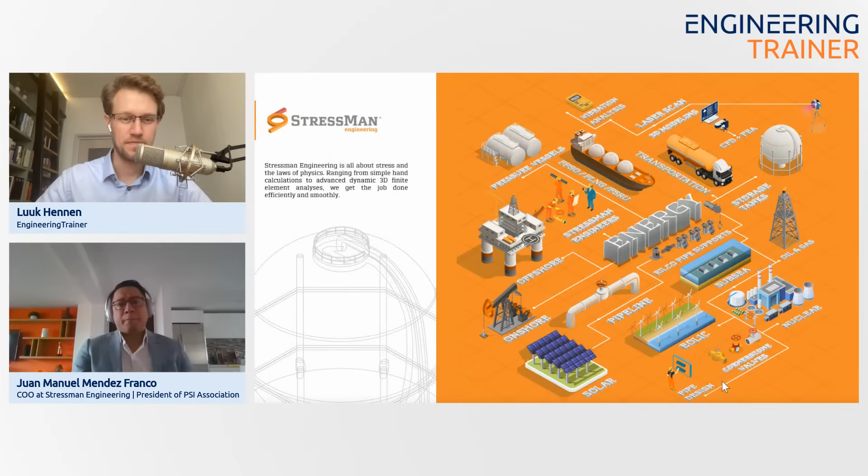Now we're going a little bit into green energy, solar, eolic. We can help you with the CFD, FEA that may be required for your project. We can support you on that and help you with piping design, a little bit more simple, but also quite important. When you have an experienced piping designer, it's going to help you save time, materials, and manpower, when you can run your projects properly.

I think this is the last one related to Stressman, or two more. We have executed more than 370 projects around the world.

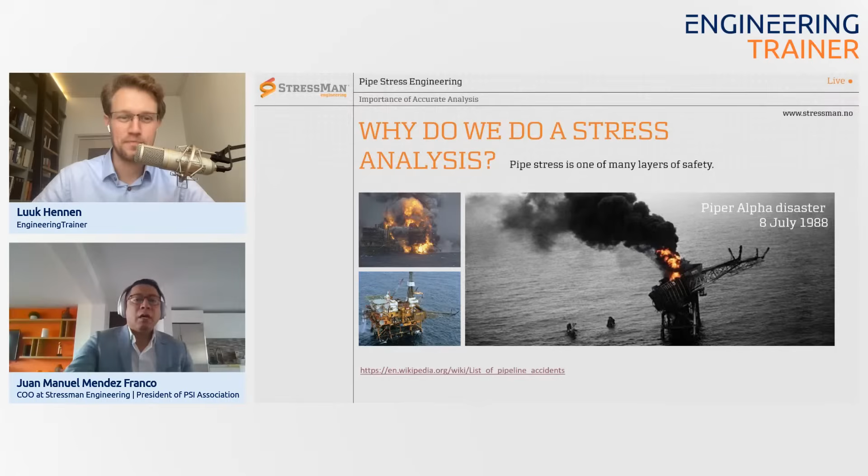Well, I'll definitely have a look at this. It was a coincidence. This is an accident that happened in Mexico. I think that is too loud. Okay, it's better now, right? So this was an accident that happened in Mexico last year, July, fairly recent.

I saw these images. They are quite impressive, to be honest, because it looks like lava coming out from the ocean, and it was a gas leaking.

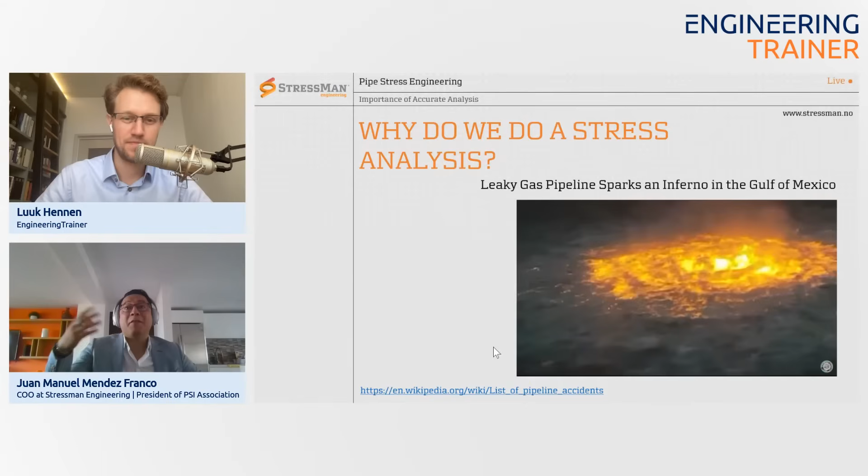It was funny because that day, this happened in the Gulf of Mexico, and that day I was in the Gulf of Mexico. For whatever reason, I had a tour in a helicopter as well - one of these companies that provide services taking people from onshore to offshore platforms gave me a tour. So I was flying when this accident was happening, and a lot of people thought that I was actually there having a look at this, but I wasn't. I was maybe 300 kilometers away, not so far, but I was in that region.

So these are again more accidents that can occur because of poor piping analysis, or not because of poor piping analysis, but because of poor engineering.

Well, to continue, for people that are not so familiar with piping stress analysis, there are three different types of loads that are normally reviewed to verify the stresses on the pipe system. The first one, the piping loads - the primary loads - are related to the weight of the pipe and the internal pressure.

Then you have the secondary loads that are related to the temperature of the piping system. And the last one are the occasional loads, related to loads that may occur but not all the time, such as wind, earthquake, snow, or when you have a PSV going off - you have to do analysis for that as well. All these three loads combined, that's the way that you calculate your piping system and design your piping system.

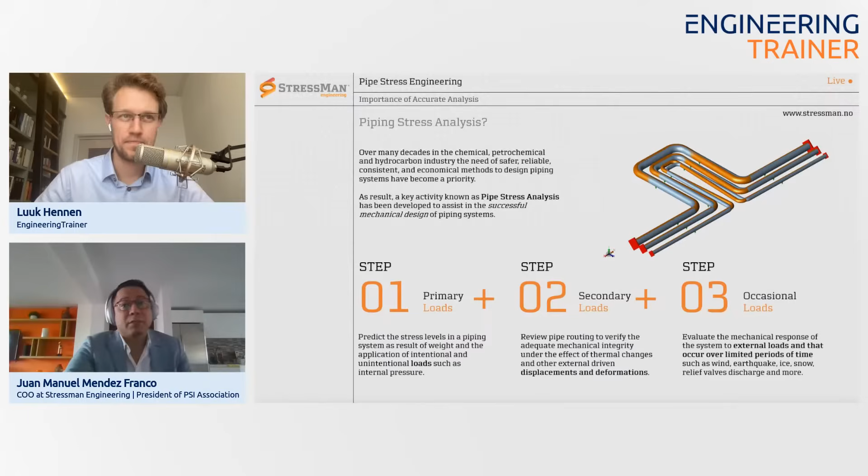This is just the very basics. I don't want to go into details. I guess the ones that are already piping engineers, they already know that part, and the ones that do not know, well, it's just a very simple explanation of what's involved in piping stress analysis.

So this is the main part. I want to talk about this from a piping lead or a project manager perspective. Perhaps the most accurate would be from the piping lead perspective. Project managers sometimes are not so involved with the technical part, but at least the piping lead needs to be, because we have to make some technical decisions in order to meet the timeline or deadlines of a project.

The definition of accuracy is important because that's the degree to which the result of a measurement, calculation, or specification conforms to the correct value or standard, and essentially refers to how close the measurement is to an agreed value. So that's the definition of accuracy.

We have this graphic here, where obviously the faster you are in your calculation, the more speed you have, but the less accurate, because people make mistakes. The faster you go on anything, the less time you have to do detailed stuff, or the less detail in things you have to do. If you want to be more accurate, the speed of the project is gonna be lower. It's gonna take longer, but it's gonna be more accurate.

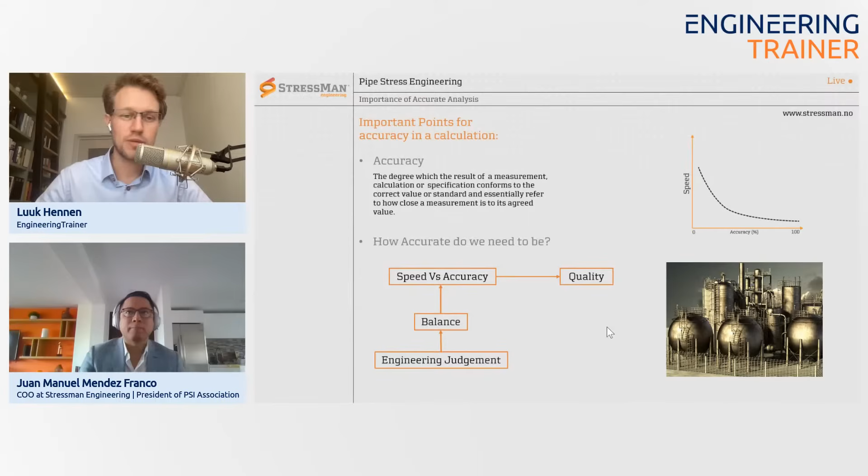How it's an interesting concept, engineering judgment. We run a training platform, so it definitely comes to the table every now and then. How do you teach people engineering judgment? Obviously working a lot helps, but the big question is how to speed up that process. Looking back at your career and the projects you did, Juan, what would you recommend to juniors or people at any point in their career to improve their engineering judgment, because that can be challenging?

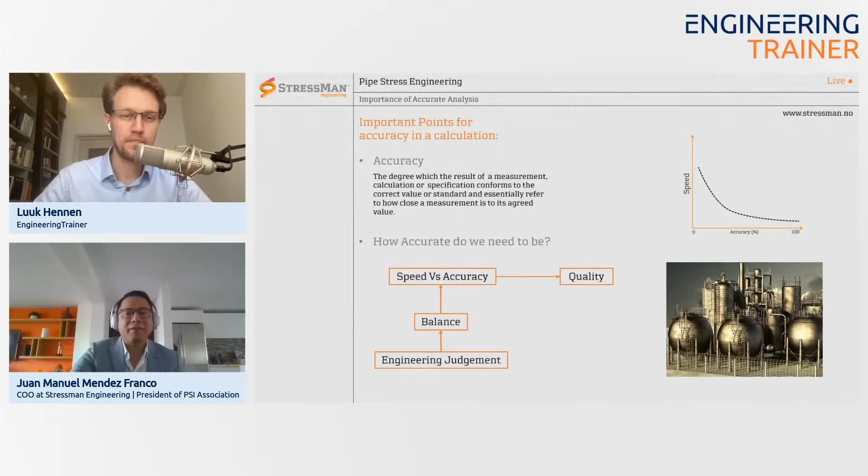How can you change that? If you have a more experienced engineer, at some point he was there, now he's here. Over the years, when you start doing something over and over and over, some people say it's the 20,000 hours - I heard 10,000 hours too, but you hear these numbers - that's when you become an expert in something. So 20,000 hours is around 10 years, because each year is around 2,000 hours, at least in the US, considering 52 weeks and 40 hours per week, it's 2,080 hours per year.

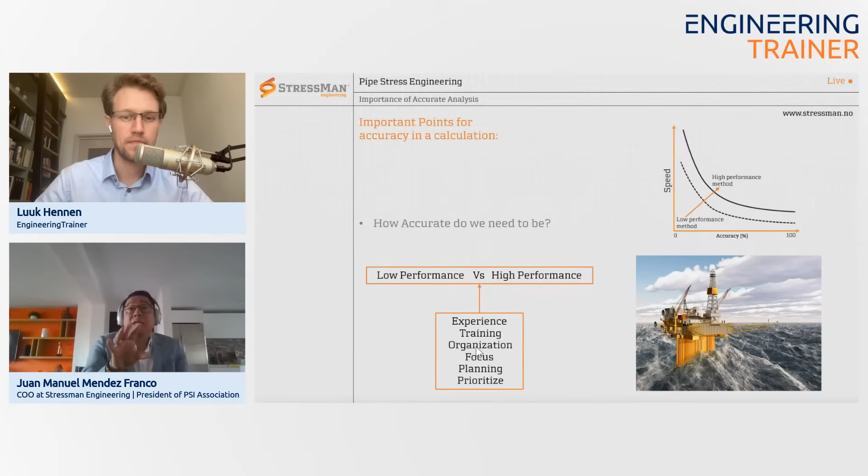So these are some strategies that you have to use to go from low performance to high performance.

We got an interesting question, and I think it's related to this slide as well, Juan. Let me address it. First of all, Ahmed Ali, thanks for asking the question, and thanks for joining the chat. Ahmed asks, how can we make the balance between speed and accuracy? You already touched upon it, it's hard to have it both ways. Maybe we can touch upon that topic during this slide, Juan.

So as an engineer, how do you make that balance between speed and accuracy, how do you make decisions for details? Well, that's something I'm going to talk about a little bit later, but it's a very good question, because there are so many variables to know what's the right balance between speed and accuracy.

Exactly. Okay, I don't know what I did. Okay, here we are, and this is the other graphic that I have. This graph is quite interesting to me, because this is something that affects projects, not just one calculation. Help me out a little bit, Juan. What exactly are we seeing on the axis?

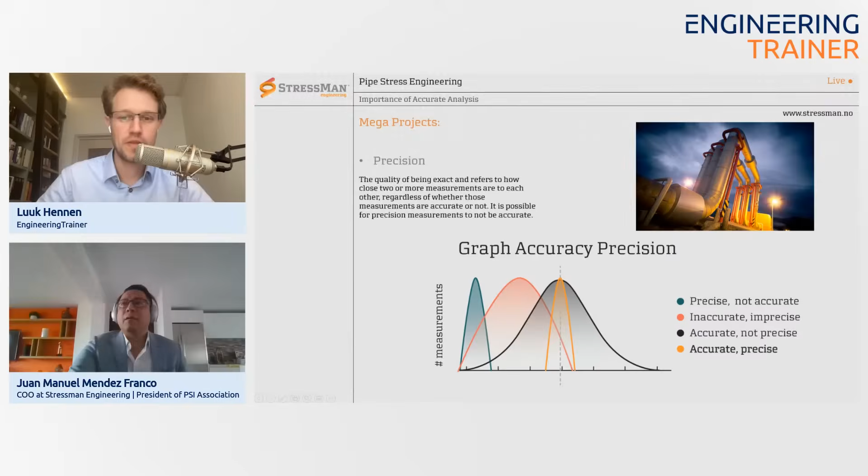So I think that's interesting. And now here we're coming to that section where it may address Ahmed's question. And we need to understand this is not a science project. When we do piping stress analysis, when we execute a project, we are not doing a science project. We have a limited amount of hours assigned to each activity, eventually to a project that we need to get things done fast pace. It needs to be like that.

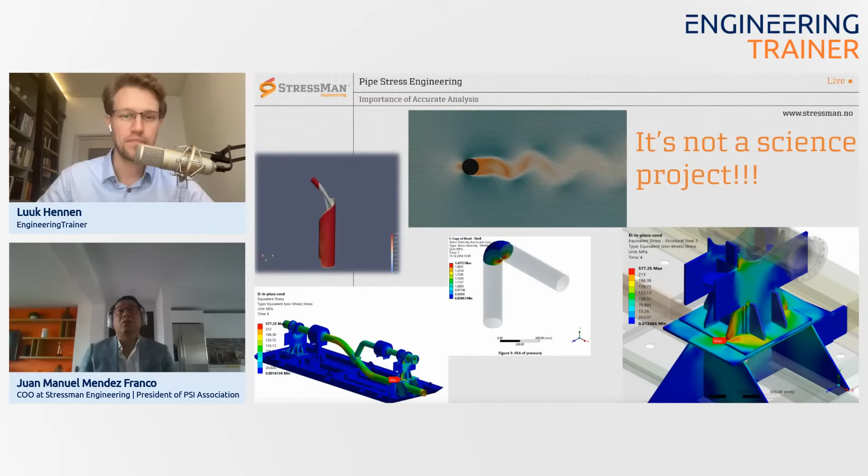And here are very complex analyses, some R&D that we have done for what we do in piping stress. I would say that 90% of the analysis are not so complex. Obviously, there is analysis with compressors, reciprocating compressors, vibration, dynamic analysis, where you need more experience and you're going to spend more time. But we need to understand this is not a science project.

Let's go to the next slide. Okay, this is the stage of the project. This also helps to address Ahmed's question about how can we find the balance between speed and accuracy.

Exactly, it depends. One variable that we can have into the equation is the stage of the project. Let's say for piping, they are normally going to get involved in pre-feed, feed, and detailed design. I remember the very first time that I worked on a pre-feed project was Cameron LNG. That was back in 2000, I think it was 2012.

Right, and it was the pre-feed for this project that I eventually worked again on, but in the detailed design stage. So in pre-feed, I remember I made some simulations, I did some piping stress analysis, but we didn't even have the correct location of the equipment. I remember I did some compressor calculations, but it was more to know that the system was a little bit flexible, that we could have the proper elevations between nozzles, sometimes especially for large bore pipe, like in the ones you can have in an LNG project, the elbows, sometimes when you try to go down, because it's like 1.5 times the diameter and you have two elbows, it's 3 times.

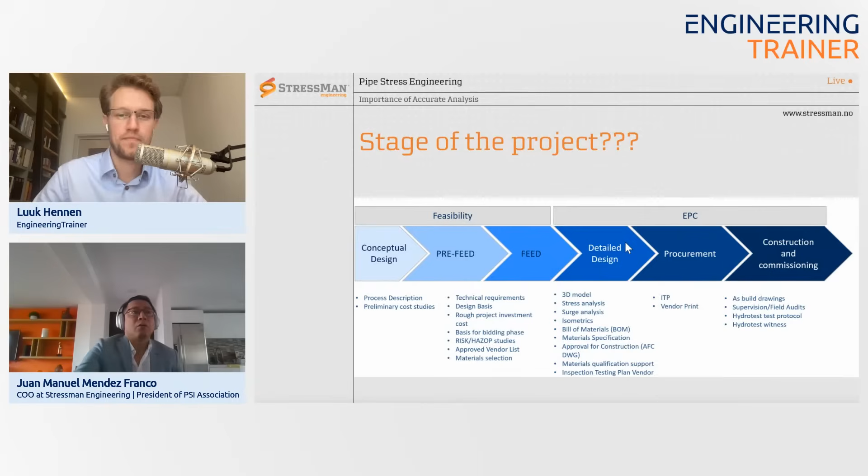So, like I said, there are too many different variables into the equation to know when a project needs to be more accurate, or the calculation needs to be more accurate, and there needs to be precision in our system, in our project. So I think that also helps to understand the reason behind it, and to try to find that balance.

Yeah, and I think this topic is an interesting one. I mean, here you can go, like, if you start adding FEA to your pipe stress analysis, you can go all crazy with levels of detail. Yeah.

Yes, of course. And I would say one of the reasons to have this beam element software, such as all the piping stress software that we use, is that the calculations we need to do are not needed to be so accurate, so precise as if you have to do it with FEA, because it's gonna take longer. I cannot imagine modeling a complete piping system that you can run, let's say, with CAESAR II or AutoPipe in ANSYS. It would be crazy. I think you probably can't even run it because it's gonna be too heavy.

So it's important to understand that, but here again it comes to engineering judgment. Obviously, when something fails, you run your calculation, you cannot meet the allowable loads on a pressure vessel for example, you can add flexibility to that joint between the shell and the nozzle in your calculation. If it fails, you can also do another analysis, WRC. If it fails, you can even go and try to do something with ANSYS. But it's like stages, you don't need to go from the basic one. When you have a table, okay, the allowable load in this direction, Fx is 300, Fy 500, Fz 200 - as long as you are below this, obviously you also have the moments, moment X, moment Y, and moment Z. If you are below that, you are fine.

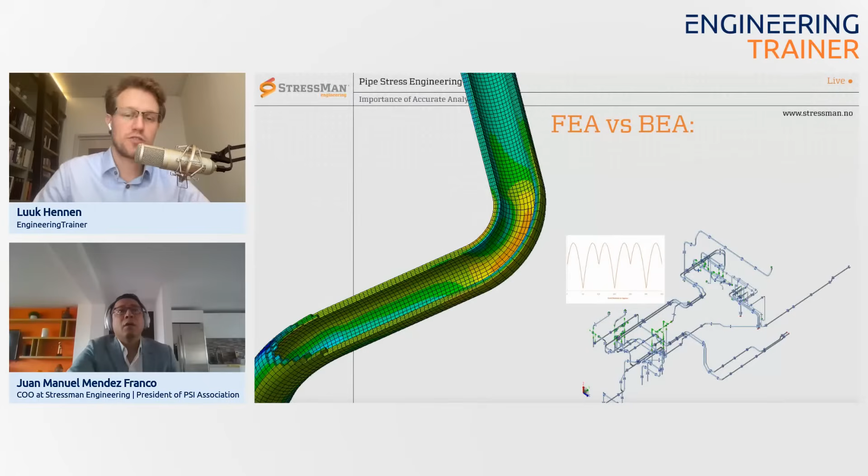It's interesting to see, Juan, just to add, in the chat we see some conversation going on about experience - that experience of the pipe stress engineer is key to make those decisions, how deep to go, from beam element to WRC, or even to FEA. I thought that was interesting to add to the conversation. I mean, it's obvious, but to me, and to EngineeringTrainer, the big challenge is also how can you speed up the process for an individual to get this experience and the associated engineering judgment. But we'll touch a little bit on that later on.

I would have to add, Juan, time flies. No worries, it's 5 or 7 minutes - like in 7 minutes we're talking for 1 hour. And I know we still have quite a lot of slides available, so let's just pick up a few more topics and maybe wrap it up in 10 minutes or so. Yeah, that's fine. If we feel like we have too many slides left, we'll just schedule a part 2. That's fine, I'm gonna try to go a little bit faster.

But for example, on subsea piping - I'm not experienced in subsea piping, but this is something that I learned from Sondre - in subsea piping it's a more detailed analysis, it's subjected to more stringent codes, and obviously it's not the same to design something that is going to be here, for example, in Medellin, where you have very nice site conditions - the temperature is never going to change, it's not so windy, if I'm not wrong I think there are no earthquakes here - rather than to have them at the bottom of the ocean. It's just a completely different design. So for this one you have to have, for example, your structural analysis and then your piping analysis.

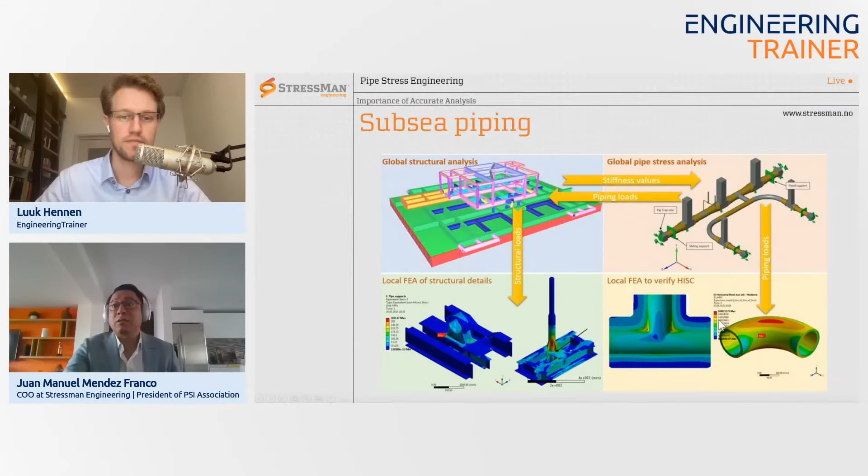It's just the requirement. And for example, on piping you also have to do this hydrogen-induced stress cracking as well, which is another complex calculation that you have to do, and there is no other option. This needs to be a more precise simulation and it's the way it has to be. Here we cannot play games in terms of maybe I don't need to do FEA, or I don't want to do it - no, you have to. There are things where it's more important, more stringent according to the codes or regulations, or sometimes even client request that you have to do it. So to continue with this, some of these topics here are not necessarily just affecting the accuracy in a calculation, but also the precision in a project.

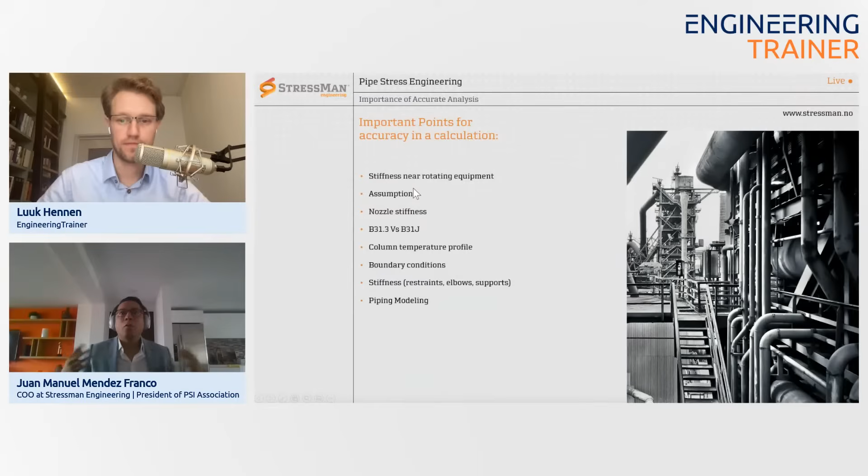This could be, for example, a stiffness near rotating equipment. When you perform your stress analysis and you're going to be working near a compressor, if you don't add the stiffness in your restraints near the nozzle, you are assuming they are infinitely stiff, which is not right. Here you're going to have little deflections.

For example, you need to check the alignment in your compressor. When you work with this type of analysis, accuracy is so important. You cannot make mistakes. The more accurate input, the more accurate output. If you have bad information at the beginning, there is no way you can have good output. It's just like that. Everybody knows that.

Okay, so assumptions as well. It's something that, because of the nature of the project, the speed of the project, the deadlines, you have to start a calculation without having all the information. And this happens all the time.

Oh, I got a phone call. We got somebody connecting with you on this.

So you have these assumptions that are going to happen all the time, and you have to live with that and learn to use your judgment for this and say, here I have to do this, I can do that. But with experience, with the years, and also with guidance from your piping lead, you can do that.

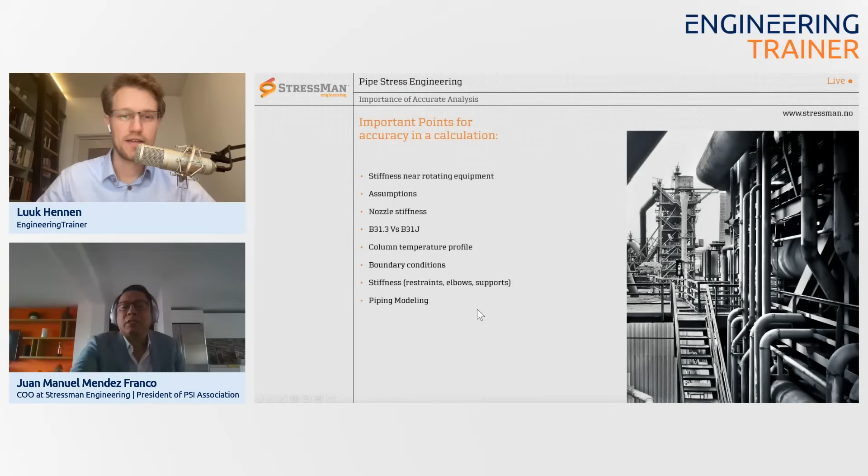Okay, yeah, and I would also like to add the level of detail in these models, right? Adding steel or gaps, obviously. Those are all decisions that designers have to make before iterating towards their results and their reports.

Yeah, like we have this other one. This is really coming from the piping lead, when he decides at the beginning, for, I don't know, 16-inch lines and below, we're gonna add 5% of additional load for our spring, for components that are not taken into account in the calculation. Let's say that you have shoes, the shoes have a weight, maybe a couple hundred kilograms, that are not taken into account in the calculation, so you add that additional weight. Some people say, okay, but for larger than 16 inches, we need to add 10% because the shoes are heavier, bigger, or the trunnion. You didn't take into account the trunnion and the base plate of the trunnion.

Different things that at the end we can be as accurate as we want, but for things like this, obviously we need to be mindful that maybe a massive pipe with a massive plate is obviously going to go from a spring that is probably a size 20 to a size 21, for example. Right, yeah, so just remember that part, as well with the weight.

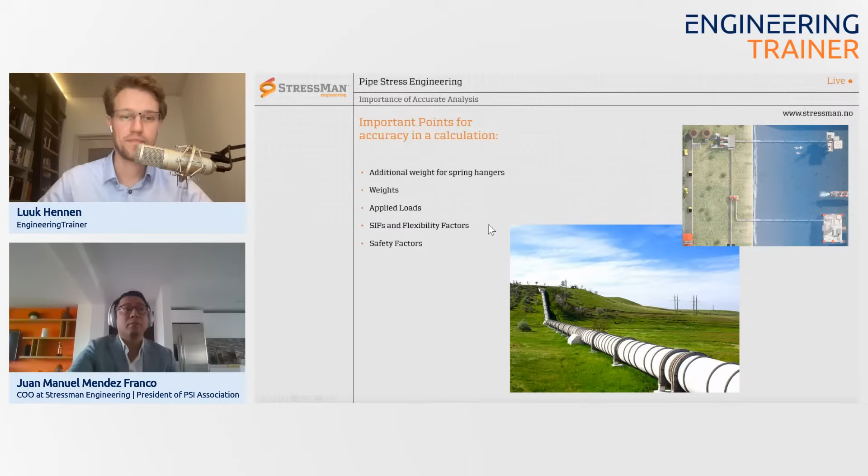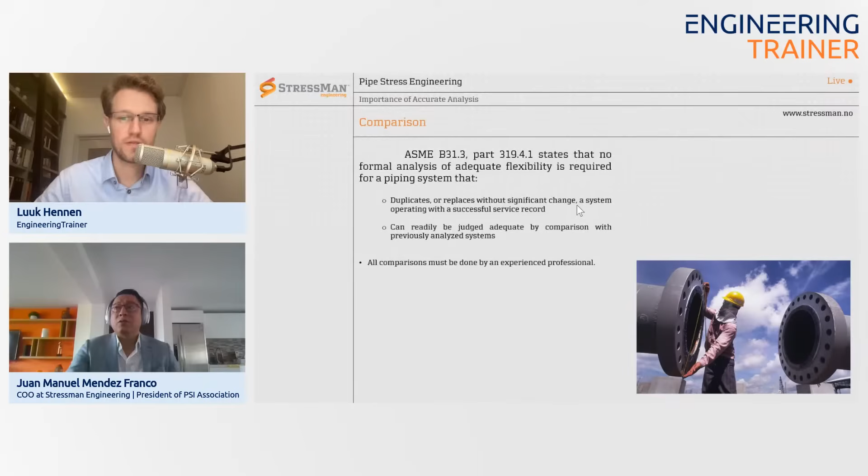Interesting comment. So again, engineering judgment when executing a project one way or another. There are certain activities where this applies - for example, to qualify a piping system once it hasn't changed, when they do maintenance, modification, or replace a component and the routing hasn't changed too much. An experienced professional can qualify that piping system without needing to run a piping stress simulation. That's when engineering judgment comes into play.

To be honest, I had a project from the very beginning where our piping lead was very, very strict. He's a good friend of mine, I'm not gonna say his name, but he decided from the beginning we were gonna run this project with zero gaps, no gaps at all, the whole project, no matter what. It was a compressor system where you just need a little bit of gap, maybe 1 millimeter, to qualify your nozzle. No way - zero gap. He said it from the beginning, set the rules like that, and we had to do it that way.

At the end, we don't know what's going to happen in the field. He said, it's just that we don't know if we're going to have the gap - maybe 3 millimeters, maybe 5, maybe 10, or they probably forgot the gaps. So we're gonna run the calculations with zero gap. On the other hand, we could have everybody running the calculation with 3 millimeters gap for each restraint, which is what you have in your piping support drawings - 3 millimeters or 1/8 of an inch - applied across the whole project. But have you seen projects doing both and comparing them?

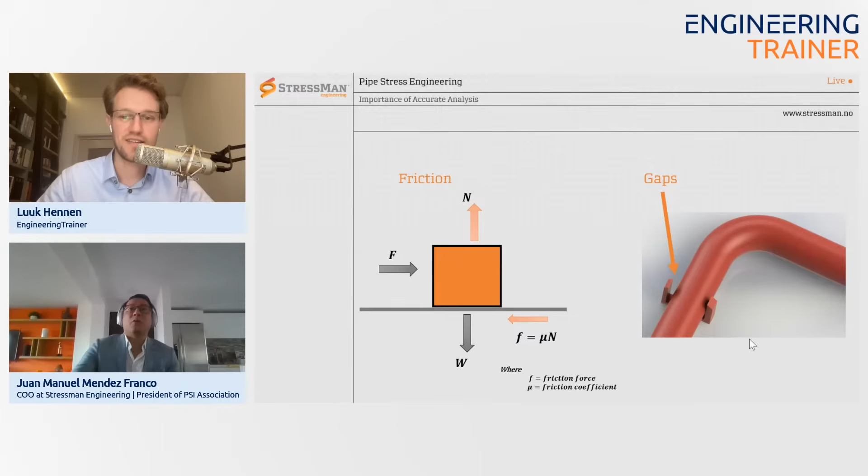Some people say that the friction between steel and steel should be 0.4. In other projects it's 0.3. For me, I would always use 0.3 because it's a factor that's going to lower the loads. If you have 1,000 vertical, now the friction is 400 instead of 300. So I would always use 300 for my benefit. But some people think, oh no, you shouldn't use 0.3, you have to use 0.4. So different things about accuracy.

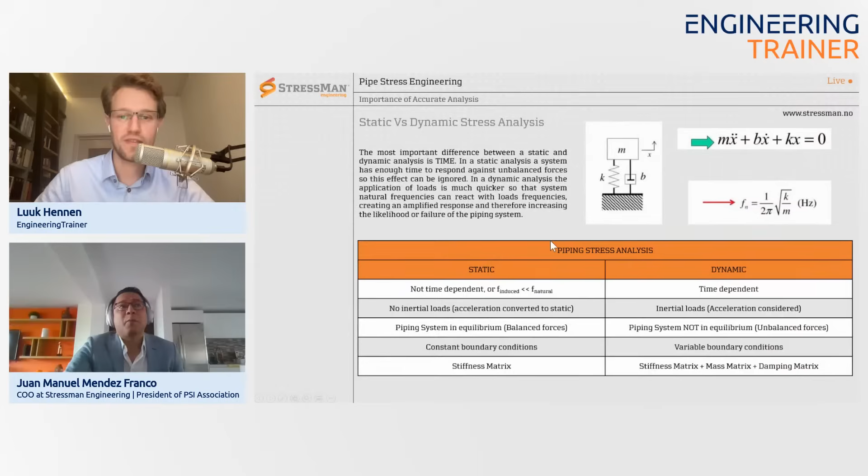Here again, the static versus dynamic analysis. Do we have to do it? We don't have to do it. A few months ago we had a request for quote. At the end, I'm not sure if we executed that project, but this company wanted to have a time history analysis just for thermal expansion. It was going to be cyclic because the system was going to be heating up and cooling down, but over a long period of time that really you don't need a dynamic simulation for. It was just considered a static analysis because at the end the system was always in equilibrium. You didn't need this type of dynamic analysis.

So here, again for precision, and this is just to finalize, I would say bad decisions from management. Why? Because sometimes they say, let's run the calculations without having the information, and then what's going to happen? The whole project is going to go wrong. Maybe for a specific case, let's say in the line list, you have that all the LNG lines are going to be at minus 200 Celsius, for example. When the line list is issued, they say, oh, we decided that it was going to be minus 260.

Yeah, exactly. Nothing is more frustrating than design pressures or something being changed late in the project. Now all your calculations need to be updated. But I know, not necessarily bad decisions, but it's just that projects are time driven, and you just need to, it's like a gamble, you know? It's like flipping a coin. It may work, it may not work. You take the risk.

The managers do that evaluation to say, okay, we don't have this information, but based on the experience of our engineers, we can run the analysis with this poor information, but with our experience we can make some assumptions that may be accurate. That's why it's important to have experienced engineers running and managing your projects, because from other projects they already know, and when you have poor or bad information, they can make decisions and make the project happen.

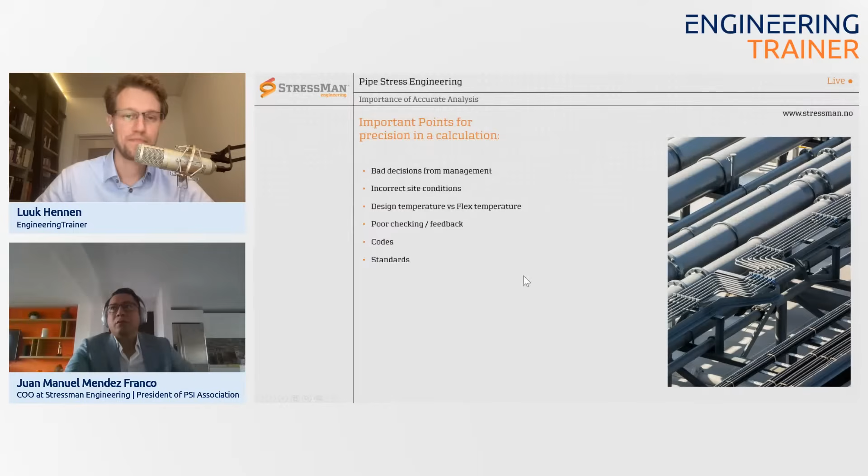And just one more, it would be the codes and standards. The codes and standards help to understand or to direct a project, to organize a project.

That's why people do things the same way, and not I do it my way, you do it your way, and another person does it another way. That's why you have standards and codes.

Yeah, it's important to know. Juan, sorry to jump in, we're running well over time, which is fine, we can go on for hours. We did this in the past, in private. Let's select one or two slides, Juan, which you'd like to address or discuss some topics about, just to move towards wrapping this up. We have a fair amount of slides available, I believe. I think that would make sense, right?

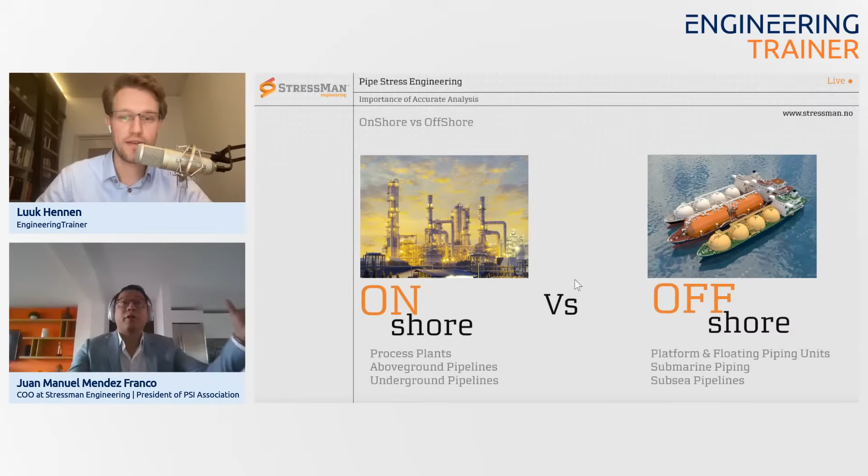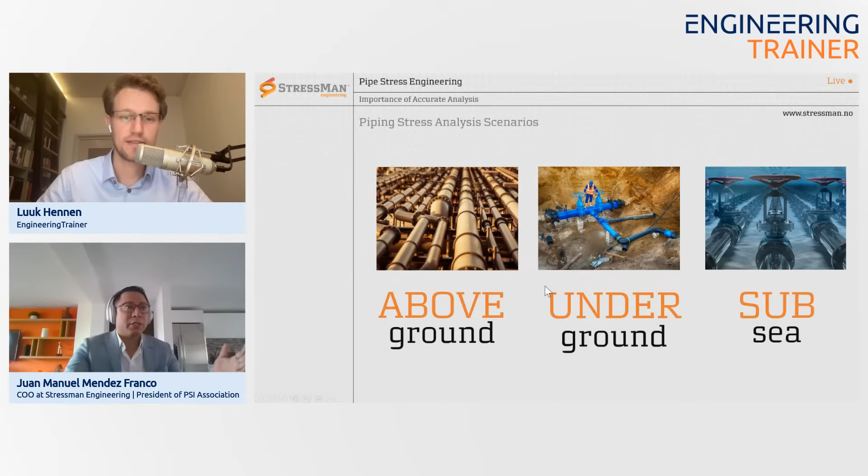Yeah, for this particular one, I would say obviously identify the nature of the project. One thing is what you're going to do in an onshore project, another offshore project. It's the same with above ground, underground, subsea piping. You know which one is more stringent than the other. Just keep that in mind. Obviously, keep in mind the stage of the project, whether it's pre-feed, feed, or detail engineering, and you have these codes and standards that you have to follow. That's what they're for.

You have standards, for example, from Equinor. You have codes like DNV, ASME, which are not just for the organization, but also for the government. They need to be approved, they need to be qualified. So you have to follow those codes. Here, there is no exception. You have to follow those codes, and you have to follow the standards.

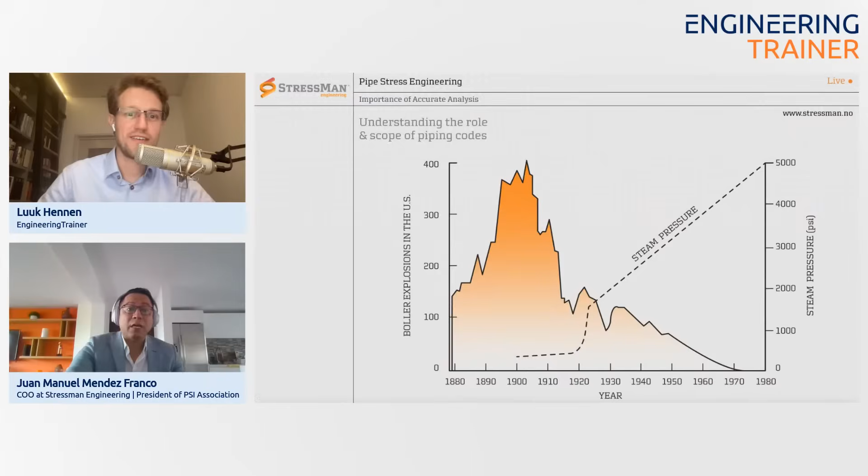I think that would be it for today. I think we pretty much covered everything that I had. Well, I apologize for being a little bit too long on the presentation. No worries, no worries on the conversation. I mean, first of all, Juan, that was a very interesting plot. Thanks for sharing. It's always nice to see some historical data, and it shows at least that we're on the right path, right? So I like seeing that.